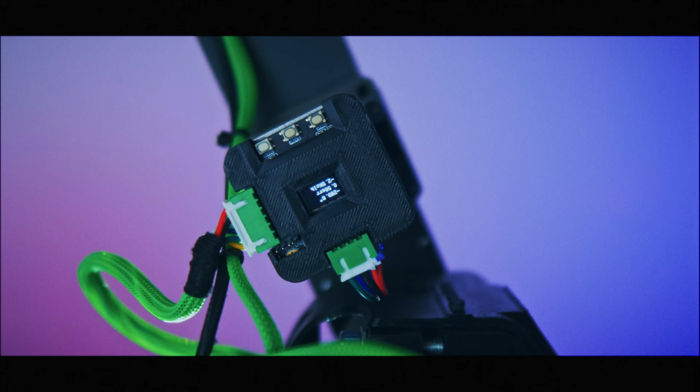Live protocol engaged. This is my first creation, a machine built entirely from the ground up. The first time my hands have ever shaped a robot.

Beyond 3D printers, beyond CNC machines, I come from a world of heavy engineering, of refuse collection vehicles, and long ago, colossal mining excavators. And when you look at this machine, you can still feel those giants echoing through its frame. But this time, I wanted something different, something personal.

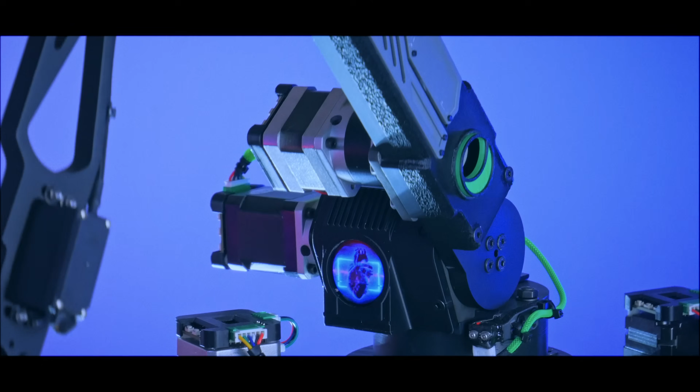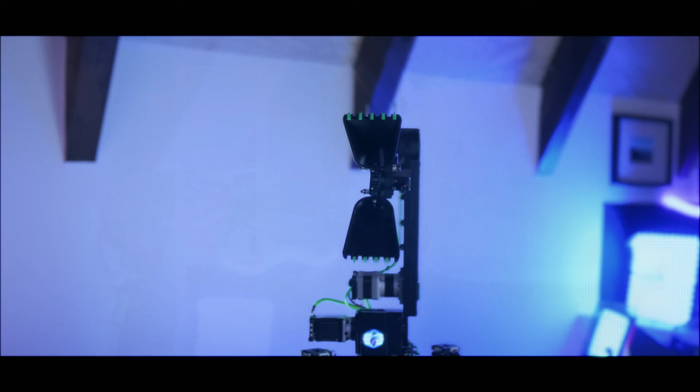I forged a creature of steel and intention, technologically dangerous, like a predator, shaped by logic instead of instinct, where mechanical precision meets something almost organic, not alive, not dead, suspended somewhere in between. I call it Snack-Made 9000, born to sustain life, designed for a single primal mission, to feed a predator safely and without fear.

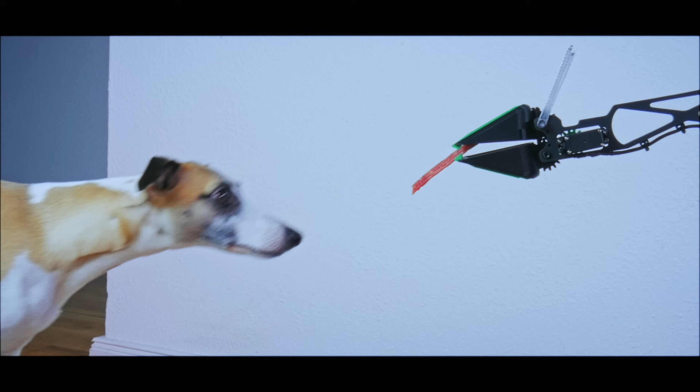Alright, welcome to my new project. My name is Leon, and as you already see in the intro, I built a robot. Not because I had to, but because I love trying new things, and I want to understand how tech works behind the magic.

The idea actually started when I installed a stair lift for my dad. This stair lift runs on an aluminium rail, a profile with gear teeth, where the drive wheels lock in and pull it up the stairs. After the installation, one complete rail segment was left over, and I thought, why not build a robot on that same rail system? That's where the whole madness began.

I want to show you, step by step, how the whole thing came together, where I had no idea what I was doing, where I had to improvise, and of course, where things actually work the way I hoped.

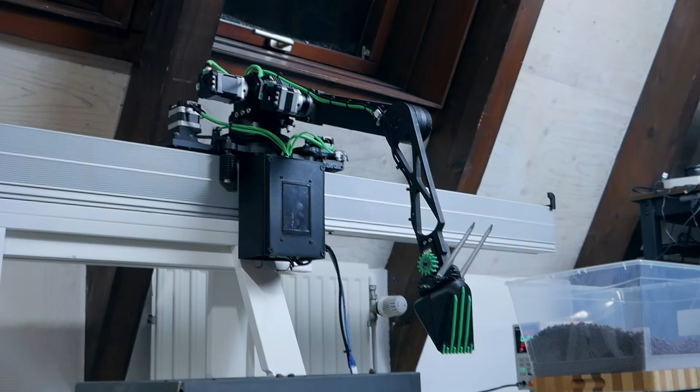The robot lives in my kitchen, and his main task is actually pretty simple. He's supposed to fill my dog's food bowl. Yeah, if it works, it would be great. If you could also give her a little sausage, then she's being a good girl. That's basically the main idea.

But because I always want a little too much, I gave him a few side missions as well. Maybe he'll help me with guitar playing. Maybe he'll empty my 3D printer. Maybe he'll end up doing things I haven't even thought of yet.

Just so you know, this is my first time doing anything with robotics. So if you see mistakes or have ideas, feel free to leave a comment.

So let's dive in. Let me show you how this started and how a wild idea slowly turned into a real machine.

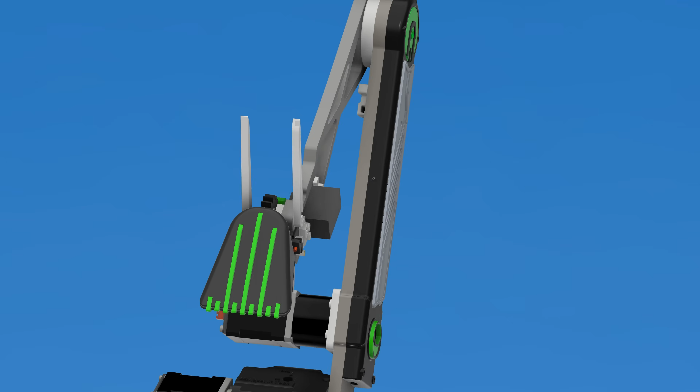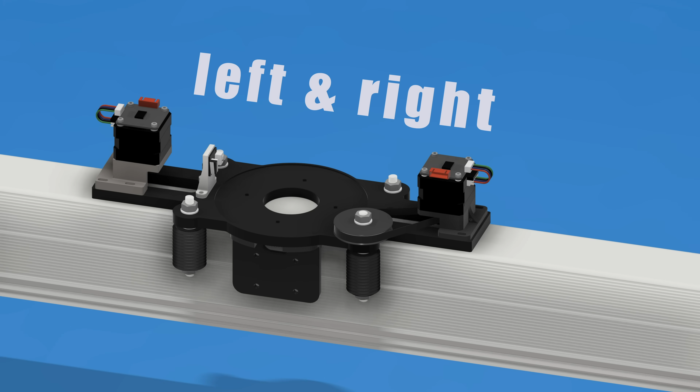The first part of the robot is the aluminium carrier profile that acts as our linear rail. On this rail, we mount the mainframe, the unit that carries the entire robot. The mainframe runs on V-groove rollers along the rail, allowing it to move left and right and serving as the foundation for all other axes.

On top of the mainframe sits a rotary base, which allows the robot to rotate, and also provides the central channel to route the cables cleanly through the middle of the system. Mounted on the rotary base is the shoulder joint, a double bearing rotary module that supports the shoulder arm.

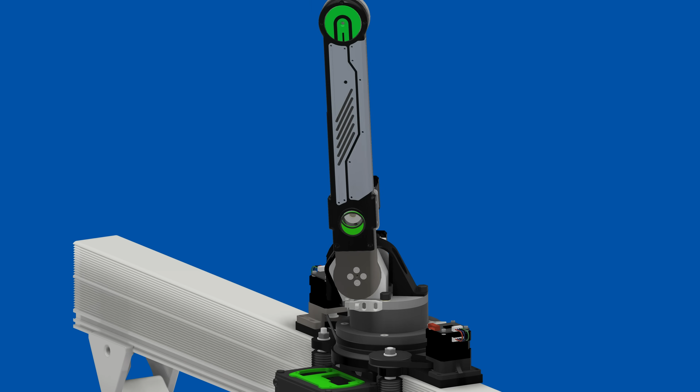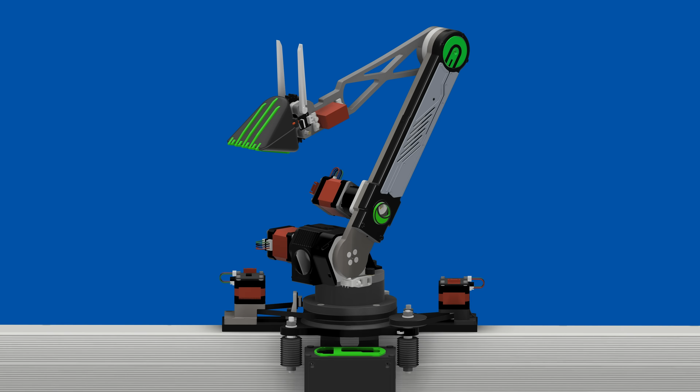The shoulder arm moves up and down, and it connects the elbow arm, which performs the same motion. At the end of the chain sits a dual scoop, driven by a small servo and a simple gear setup that opens and closes both scoop segments at the same time. The robot has 5 axes in total, 4 stepper motors and 1 servo.

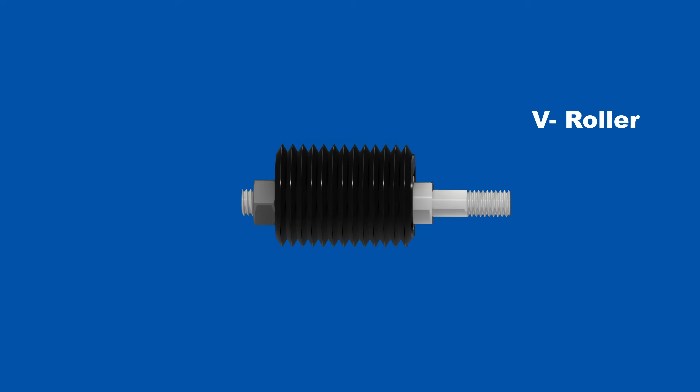Alright, theory is nice, but let's finally start building this thing. The first step is the V-groove rollers.

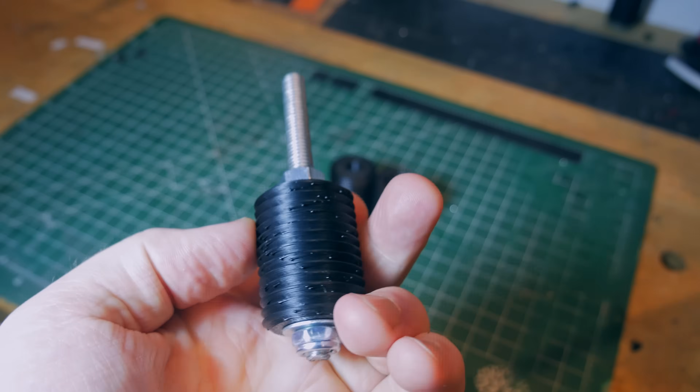They are 3D printed from polycarbonate and paired with machined steel shafts that will hold the bearings later on. The rollers have small blobs on the Z seam. I quickly remove them on my small lathe. Otherwise the robot won't run smoothly on the rail.

I press the ball bearings into the rollers using a threaded rod, which helps them sit straight and centered.

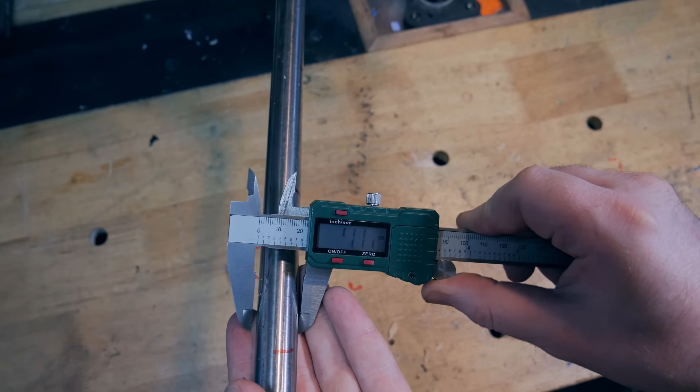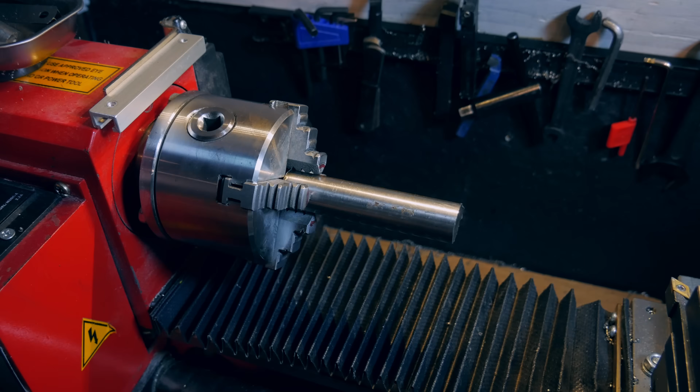The steel shafts are made from tool steel, which honestly is not exactly ideal for my tiny hobby lathe. This machine is great for aluminium or plastic, but tool steel is really pushing it. And the tolerances actually matter here, because the rollers need to glide smoothly along the rail later. So I wasn't sure how well this would go.

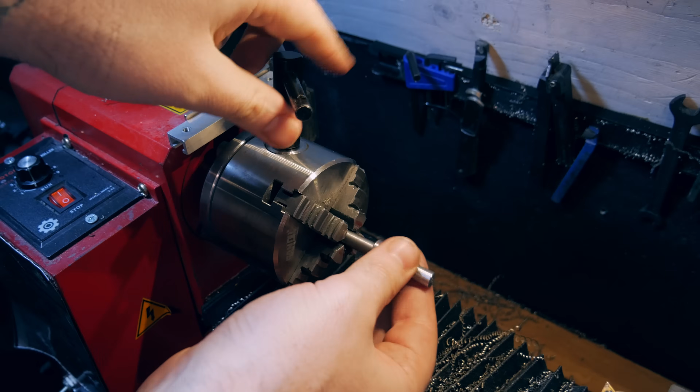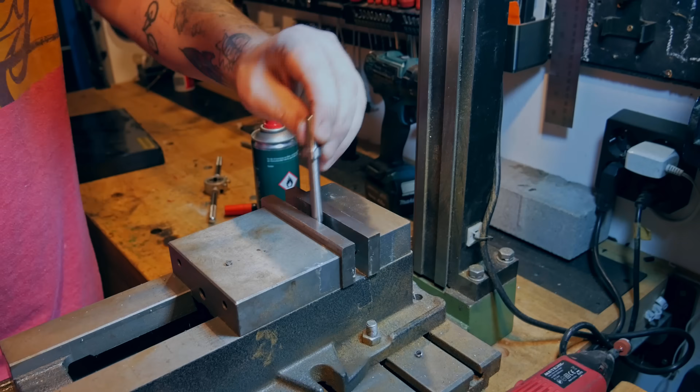But I was genuinely surprised by how well this little lathe handles this material. To make the shaft usable later, I milled 2 small flats onto it, so I can actually grab it with the wrench when everything gets assembled. On both ends, I cut an external thread. Yes, I could have done that on the lathe, but that's easier said than done.

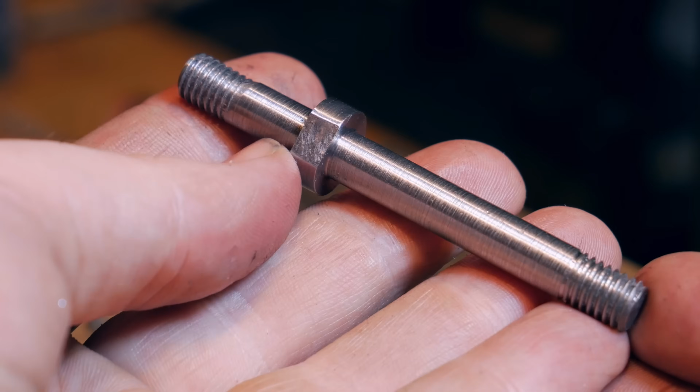Fun fact, this thread cutting set was a gift for my 16th birthday. Two decades later and I'm still using it all the time. Anyway, the shafts fit the bearings perfectly, no play at all, and they are ready to use.

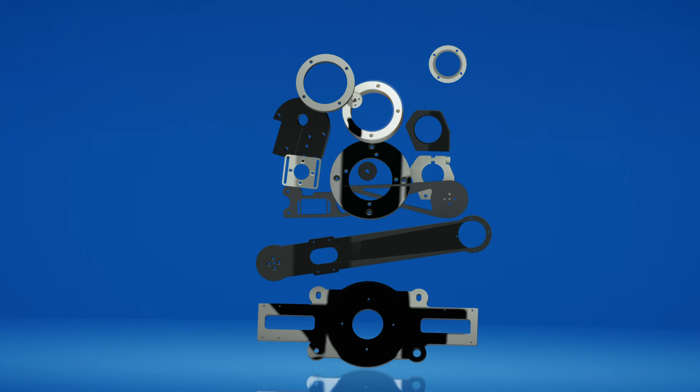As you can see here, I've reached a point in the build where I need precisely manufactured CNC parts. All the components you see here need to be milled out of aluminium. Most of them are simple enough, but 2 parts are especially tricky: the main frame and the shoulder arm.

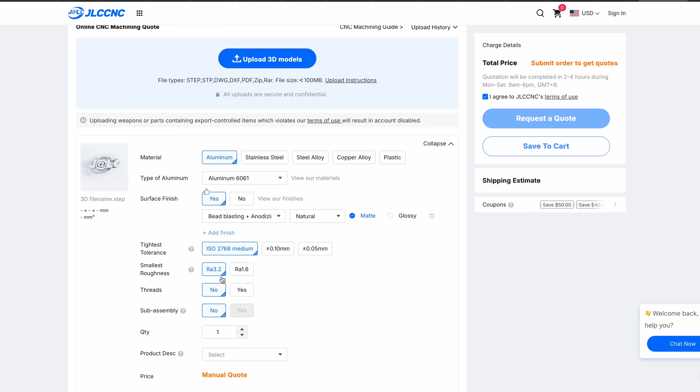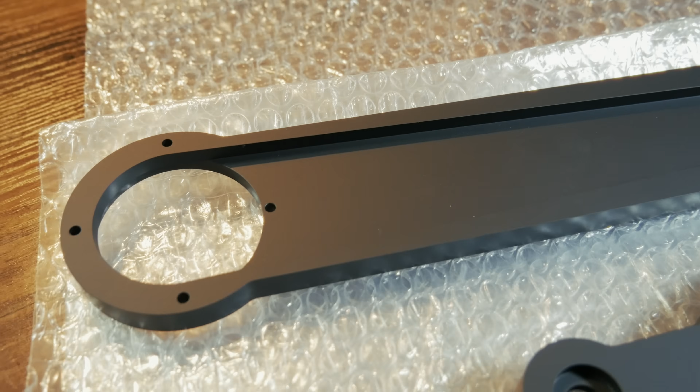After I placed my order, the parts arrived just 3 days later. Over a single weekend, shipped half across the world, and they look seriously good. Like, look at this. These parts are genuinely beautiful.

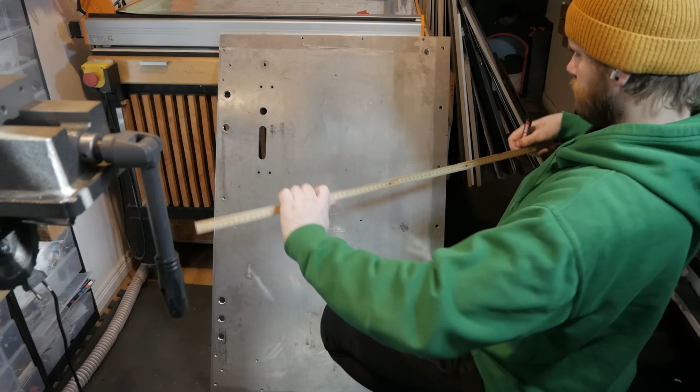I'm machining most of this part out of 5083 aluminium. It's a really nice alloy to work with, strong, stable and usually very friendly on the CNC. But I don't have enough of it, so I also have to use this big aluminium plate and I have no idea what alloy it is. Could be perfect, could be a disaster. A bit of a gamble.

Before machining, I set up the toolpath in Fusion 360. That's the CAM software I use. I can build every toolpath visually instead of writing G-code by hand. So in theory, everything should go smoothly. For cutting aluminium, I usually stick to DLC-coated end mills. They've given me good results in the past.

Yeah, that end mill goes straight into my collection of doom cutters. And yes, aluminium and I have some weird problems between us. Sometimes I get impatient and push the feeds too far. Sometimes I clamp the part badly and the vibrations go crazy. And sometimes, like here, I simply messed up the Z height and the tool dives 10 mm too deep. Perfect recipe for destruction. Anyway, I've got a job to do.

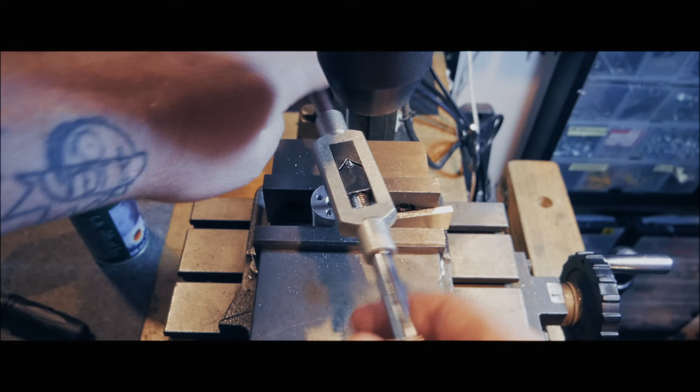They're definitely not as clean as the sponsor-made parts, but for my own machining, I'm pretty happy. To finish them properly, I'm going to sandblast everything and then anodize it. It will be my first time anodizing aluminium, so I'm honestly excited to see how this turns out.

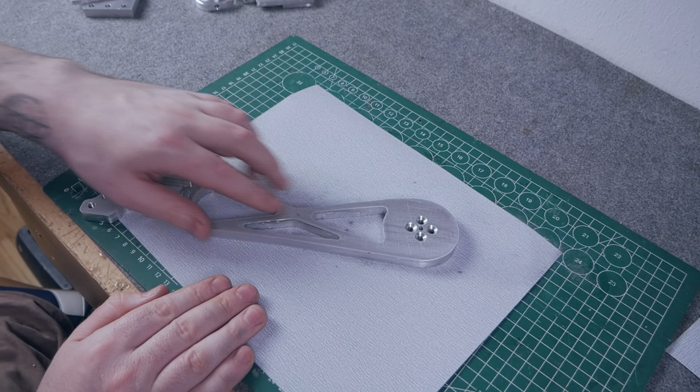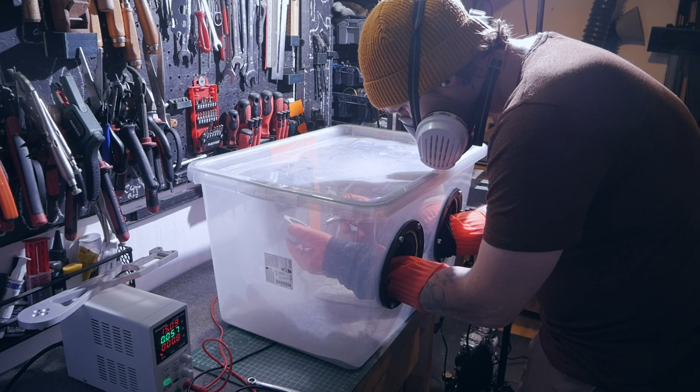I give all the parts a rough sanding, just enough to take away the worst marks from the CNC work. To make the finish more uniform, I sandblast every part afterward. The sandblaster I'm using is honestly way too small, so it takes forever, but in the end I did manage to get a decent surface out of it.

Now anodizing. This is not a tutorial, I'm doing this for the first time, and the chemistry involved is no joke. Acids, heat, electricity - it's a process where you double check everything before you switch the power on. The workflow is simple on paper: a cleaning bath to strip off fingerprints and oils.

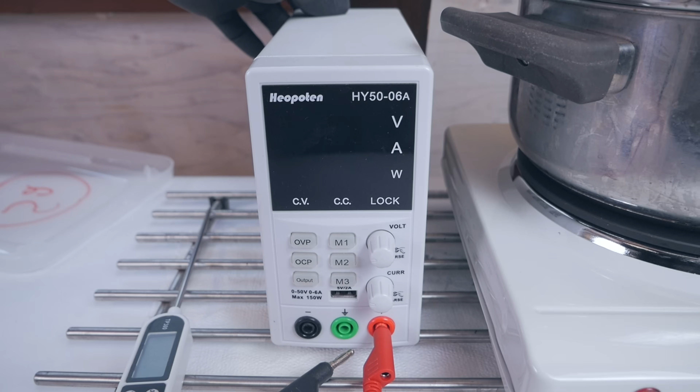Then into the anodizing tank, where the real magic happens. Here the current density has to be right - too low, nothing happens; too high, and the layer burns. The moment the power supply drops to 0 amps, the anodizing layer is done.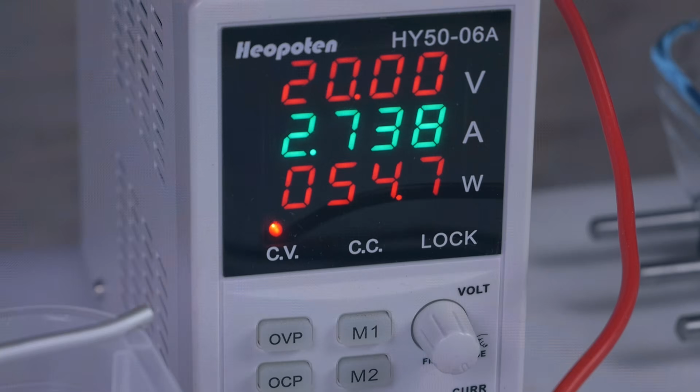Next comes the dye bath, 50 minutes in hot dye, gently moving the part so the color settles evenly. After that, the sealing bath, where the pores are closed and the surface locks in for good. From this point on, the color isn't coming off, at least not easily.

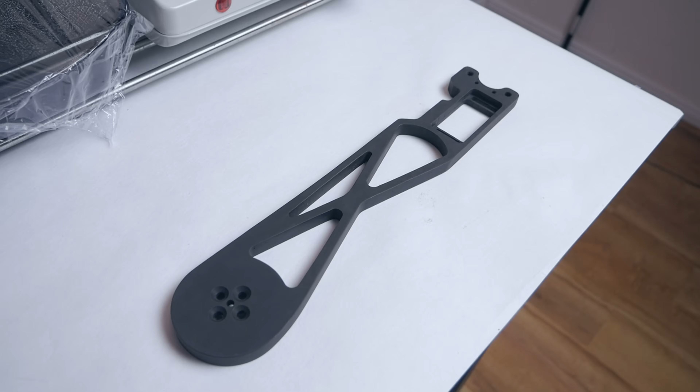For a first attempt, I'm honestly happy with the results. Under this brutal studio light, they look flatter than in real life. Later in the robot shots, you'll see the black has much more depth than it seems here.

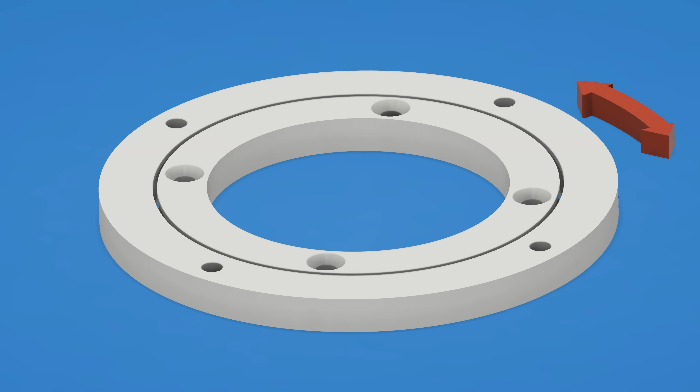With the anodizing out of the way, it's time to focus on the main bearing - the part where I really tried to save every penny I could. This is the main bearing, the one the entire robot rotates on. Normally a proper turntable bearing of this size would cost €100 or more. I didn't feel like spending that, so I tried something else.

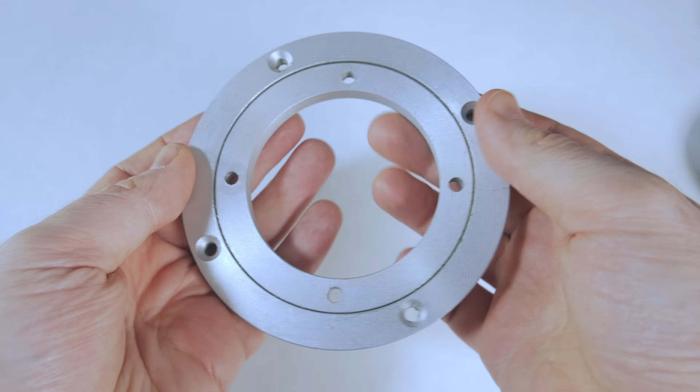I started with a cheap metal lazy Susan bearing, the kind people use for TV stands or fruit bowls. It turns, it works, but it has way too much play for a robot. So I built a second bearing around it - two custom halves, one of them holding the lazy Susan, machined and 3D printed where it made sense.

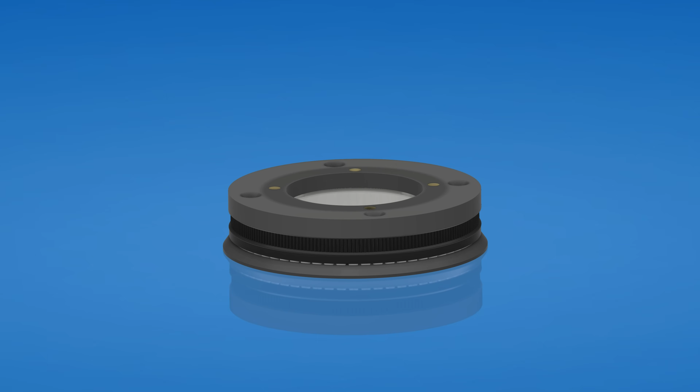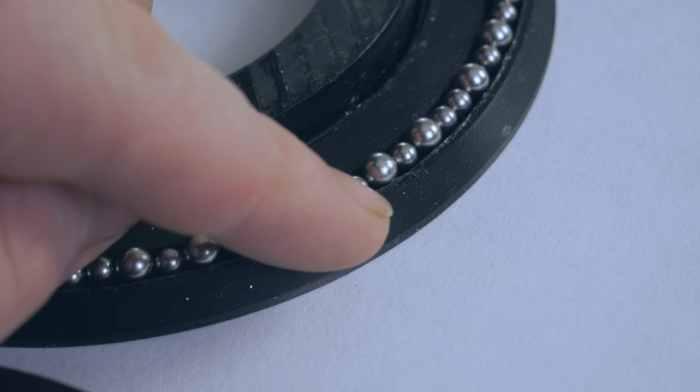Each half has a circular groove. I filled those grooves with loose ball bearings, arranged horizontally. When the two halves bolt together, the balls carry the load on a wider diameter than the original bearing, and suddenly the whole thing becomes incredibly stiff. Zero play, zero wobble. In the end, it's just a cheap bearing, embedded in a slightly over-engineered support system that makes it work.

Alright, so how does the electronics actually work? This robot may look completely custom on the outside, but on the inside it's surprisingly close to a 3D printer. The mainboard is a Robin Nano from my old printer.

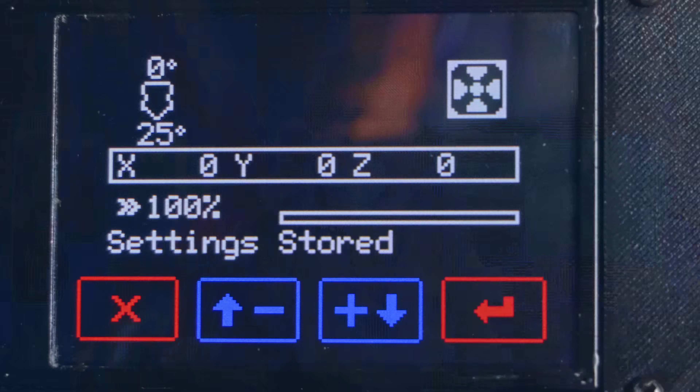It runs my own customized version of Marlin, a motion firmware normally used in 3D printers. I removed everything I didn't need, added the features I did need, and ended up with a firmware that's basically tailored to this robot. Each axis has its own end-stop switch that allows the robot to home itself and know where 0 is. Without homing, any kind of repeatable motion would be impossible.

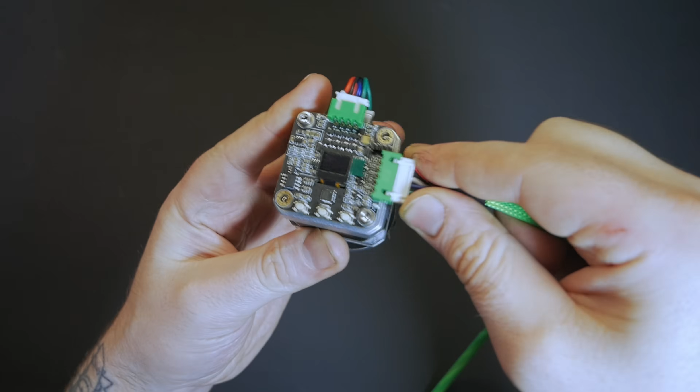For the motors, I'm using closed-loop stepper drivers from MKS. They correct themselves in real time, so as the arm hits resistance or loses steps, the driver notices and fixes it on the fly. That stability is absolutely essential, even for a robot this small.

To actually control the robot, I wrote my own Python tools. One script lets me drive the arm with a PS4 controller, and another module can record complete motion sequences so the robot can perform tasks automatically. I'll go deeper into that system later. For now, this is the backbone of the whole electronics that makes the whole robot move.

To move the robot we also need these cables, but I wasn't happy with how they look. So I found several sleeving options on AliExpress, and I chose the green one. What do you think, does it work?

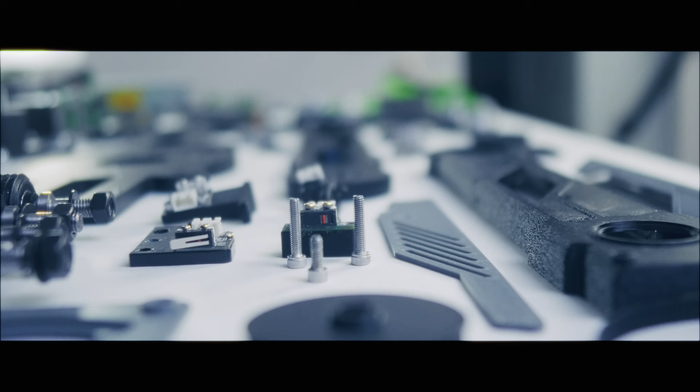All components are finished and ready. Mechanical parts, electronics, and even the cables are laid out and waiting. This is the final assembly phase, where everything comes together as a complete system. Let's start assembling.

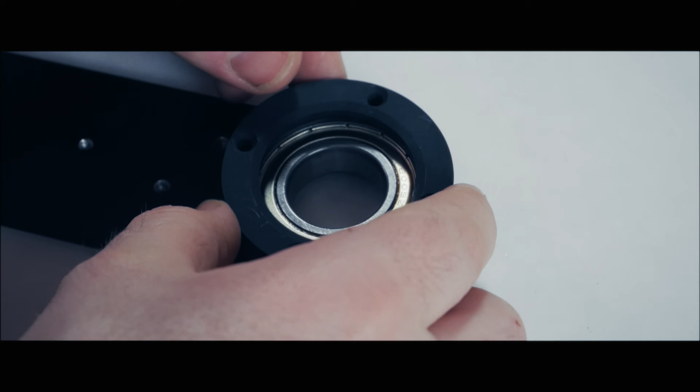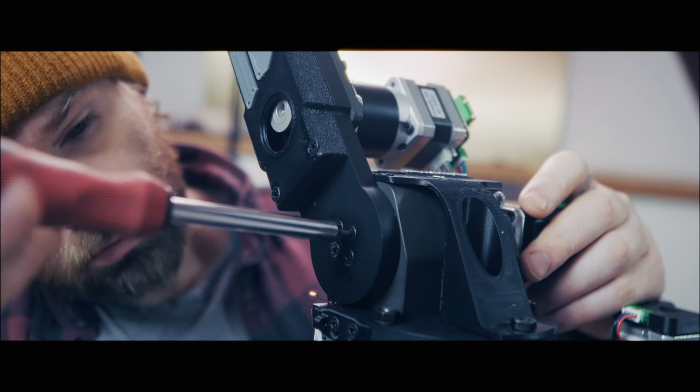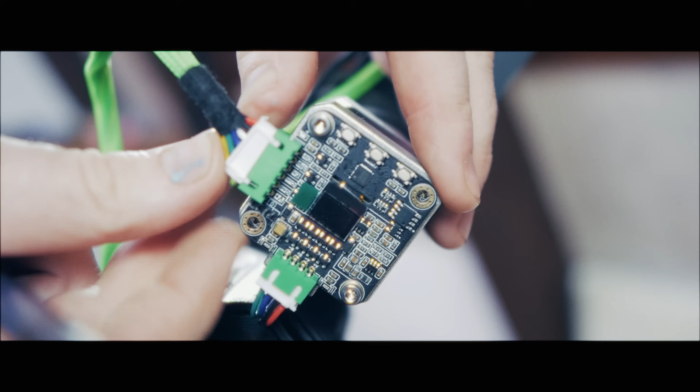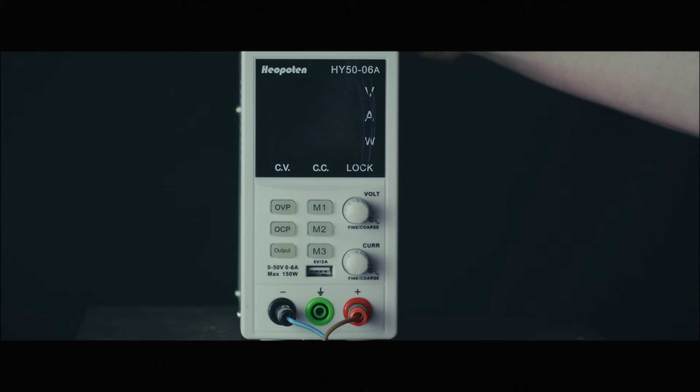After months of designing, machining, adjusting and refining, this is the moment where everything finally comes together. Most days it's not really fun. After a long workday, it would be easier to just take a break instead of spending even more hours at the workbench or behind the computer. Projects like this are demanding, mentally and physically. But moments like this, when all the parts finally come together as a complete system, make every hour worth it.

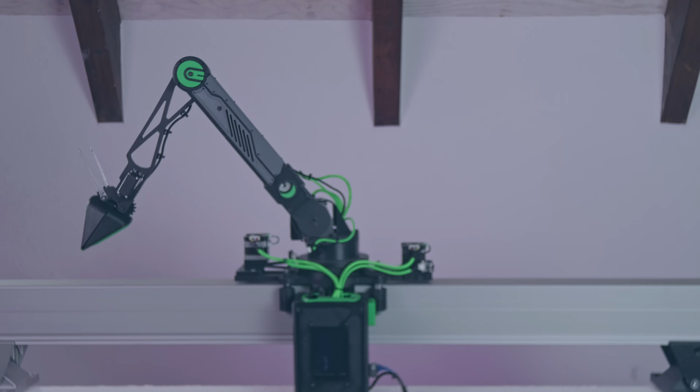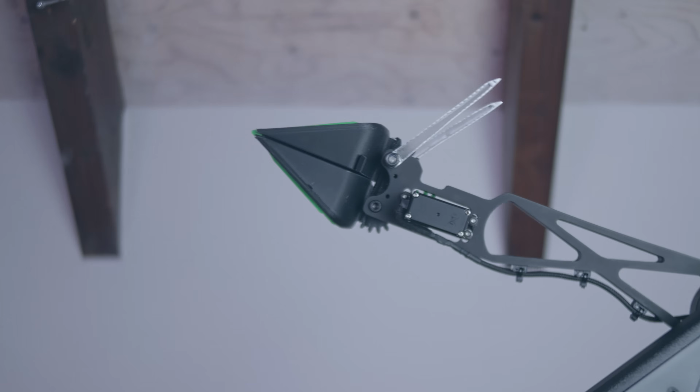The robot is now fully assembled, and after a few days of programming, the axes finally move the way they're supposed to. I can rotate the robot, move it left and right along the rail, control both arms independently, and open and close the shovel. I can also store individual positions, and when I have several of them in sequence, the robot can replay simple motion routines automatically. My custom control software still crashes occasionally, but overall the system is already surprisingly reliable.

But is that enough to fill Yuki's bowl?

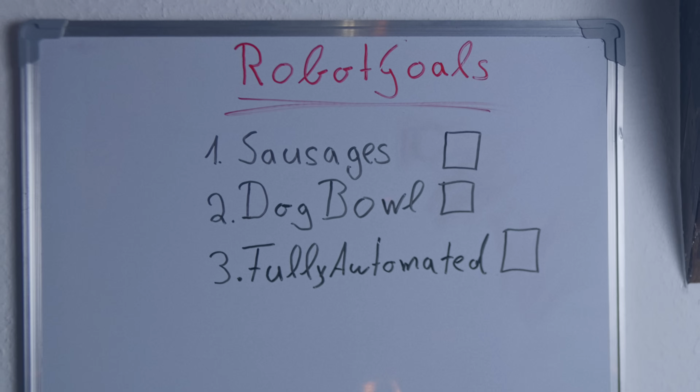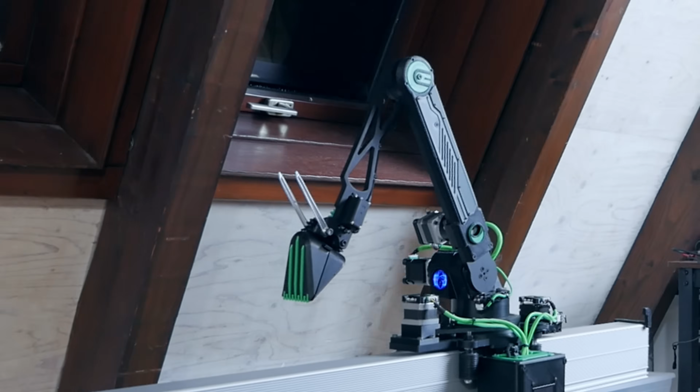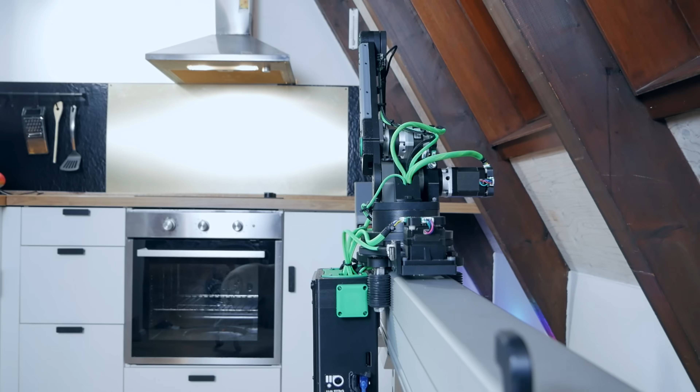As a first task for the robot, I wanted it to distribute sausages. For that, I built a small sausage dispenser that automatically feeds the next sausage after one is taken, at least in theory. Everything you see here is still remote controlled. I'm not ready to fully automate tasks like this yet. Gripping the sausages turned out to be a real challenge, but with a lot of practice it gradually started to work better. Once the snack was securely held in the scoop, distribution became surprisingly reliable.

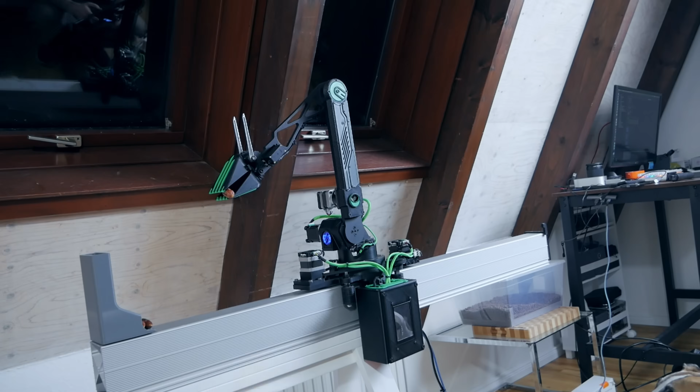The dogs were far more curious than I expected. They weren't afraid at all, which was actually my biggest concern at first. But a robot that hands out sausages is apparently just too tempting.

One of the whippets went absolutely crazy for the robot. He kept trying to steal the sausages whenever he got the chance. And in the last shot, you can even see him pulling a sausage straight off the scoop himself.

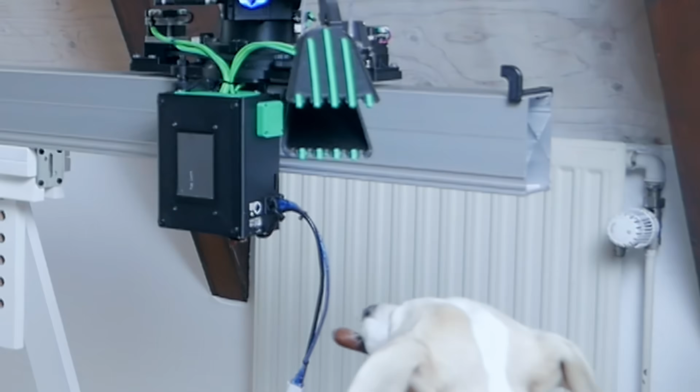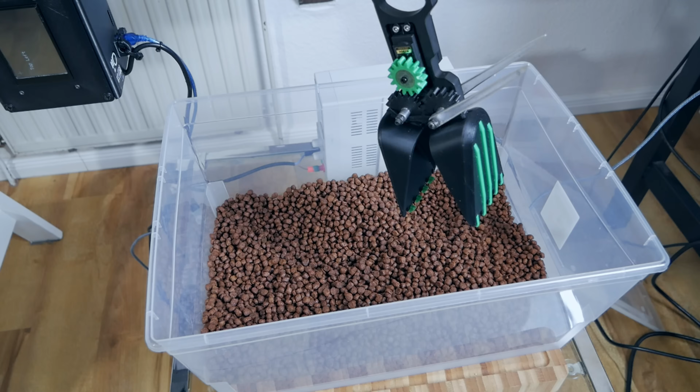So what about the next task? The one I actually built the robot for: filling the dog's bowl. I filled a large storage container with dry dog food, small pieces the dogs like, that the scoop can actually handle. The goal is simple: grab a proper portion, don't spill half of it on the floor, drive to the bowl, hit the target, and hopefully not mess everything up.

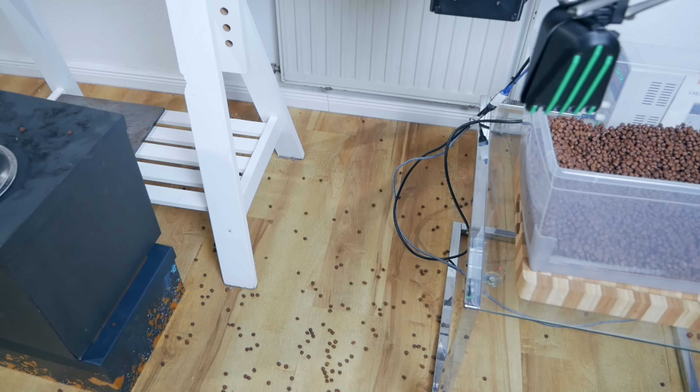As expected, the first attempts were messy. But I wasn't too worried. My four-legged cleanup crew handled the situation perfectly.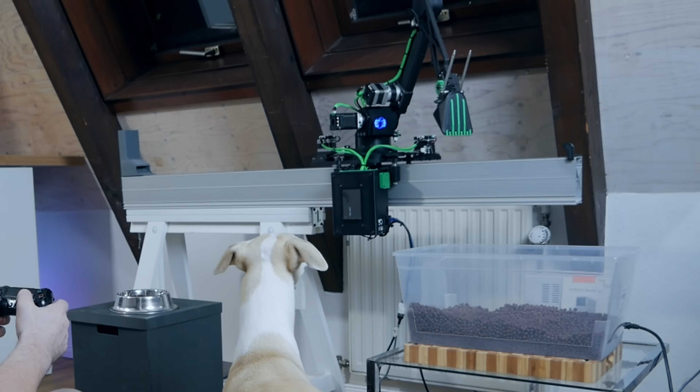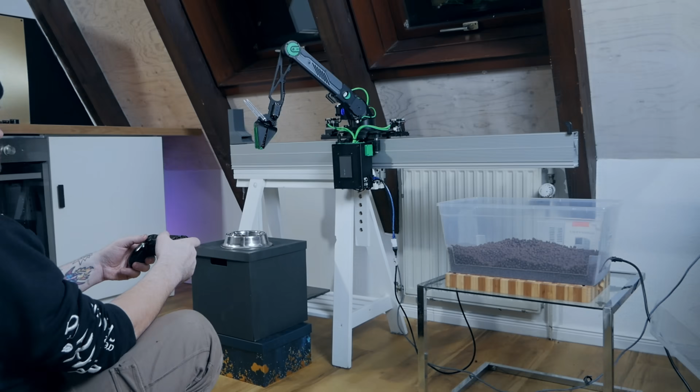With a bit of focus and practice, it started to work surprisingly well. The key was moving the axes very gently, and before driving over the bowl, I gave the shovel a short shake, just to get rid of anything that wasn't sitting properly. In the end, it almost felt a bit like operating an excavator, and the task finished exactly where it should, with a full dog bowl.

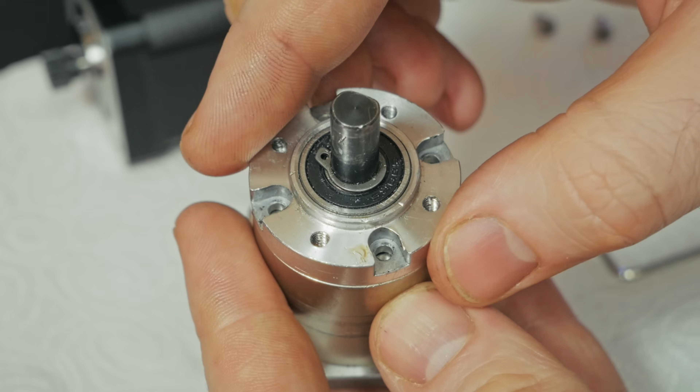Now that both tasks are working, the obvious question is, why not automate the whole process? The short answer is, with my current setup, I'm starting to hit some limits. I did try to push the bowl filling task closer to full automation, but the result was a failed planetary gearbox. The teeth simply gave up. Not because the idea was wrong, but because I lost the kind of direct feedback that I still have when I control the robot manually.

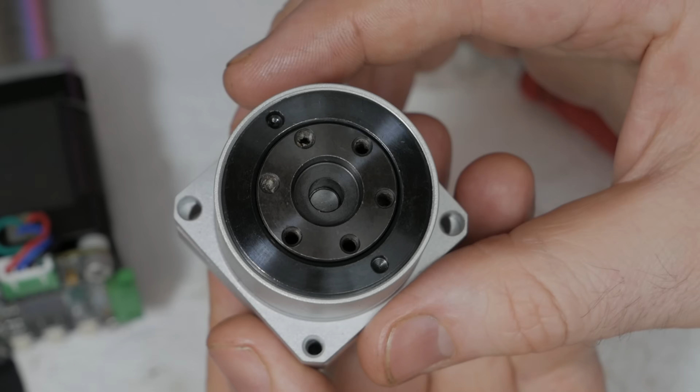So for the next step, the plan is to use harmonic drives at critical points, experiment with different stepper drivers, and add a camera to the system. Visual feedback could help me judge motion and react to problems earlier. That's also where things start getting interesting in terms of AI-based evaluation and learning behaviors.

And I haven't forgotten the side quest. I definitely haven't forgotten the software behind all of this. But this video was about getting the robot to work. The deeper dive will come next. That will be the focus of the next video.